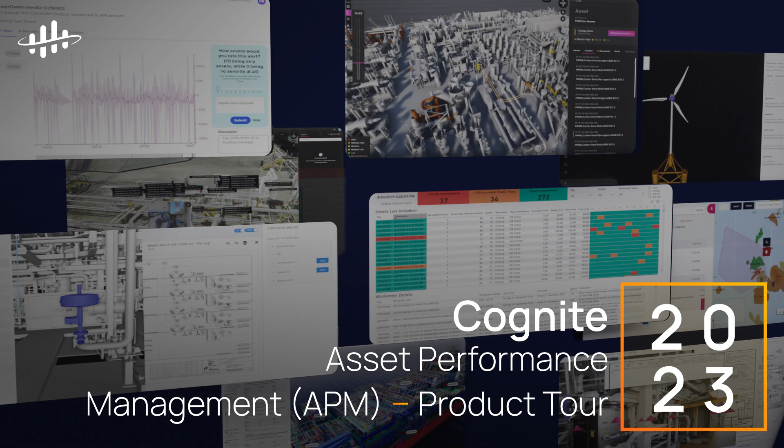matters. Today, we will cover about an hour of product and customer value-focused demonstrations. I also will be joined by my colleagues, Catherine Stentevold and Marius Biermann, who will be guiding you through the powerful key features and capabilities of our core product offerings that have allowed heavy asset companies to realize returns on investments of north of 400%.

I'm also excited to share that you will hear from our partner, Pinnacle Reliability, who will be sharing how they're leveraging Cognite Data Fusion to deploy and scale their reliability solutions faster and more effectively than ever before. In addition, you will learn about customer value stories from OMV and Celanese about how they're leveraging Cognite Data Fusion to conduct safer and more efficient maintenance and operations in the field.

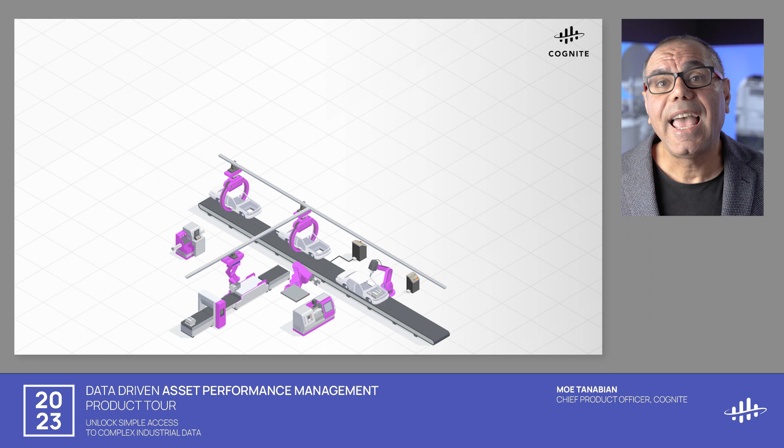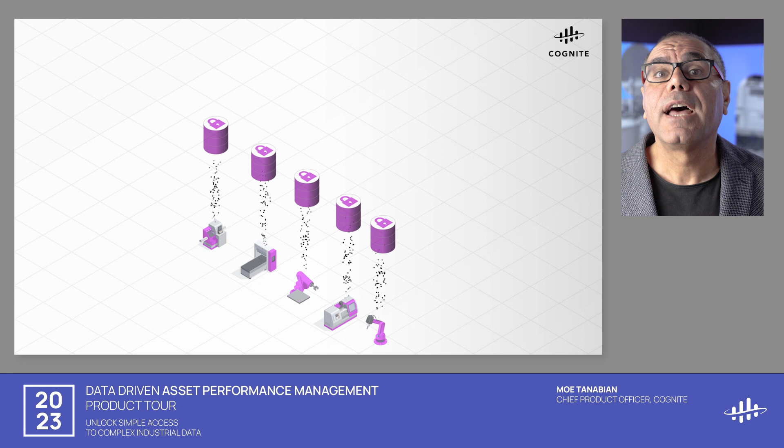APM success depends on solving these industrial data problems, and that's why Cognite's approach to APM places an open industrial digital twin at its core. And this industrial digital twin is the aggregation of all possible data types and sources, data sets, both historical and real-time, related to a given physical asset or a set of assets in a single unified location. Cognite Data Fusion enables you to bring all of your data into a single repository, automatically contextualizing it, and rapidly building use cases to improve the performance of your heavy assets.

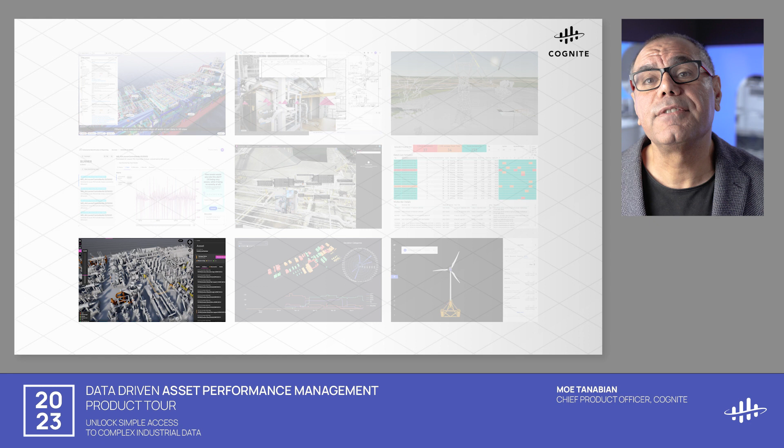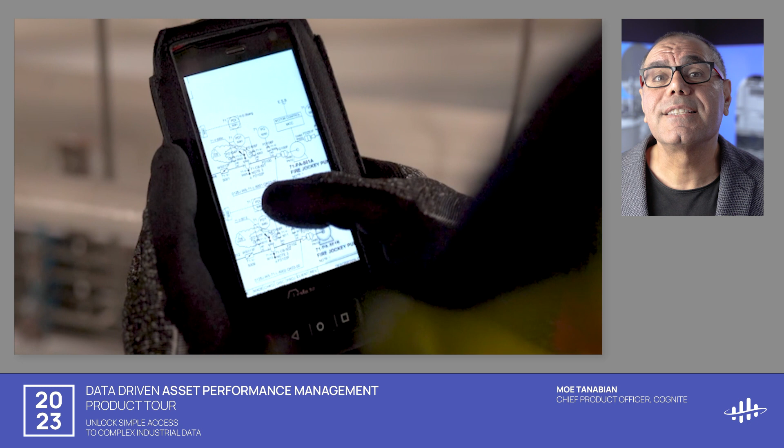Cognite Data Fusion also enables and has enabled some of the world's most innovative and most valuable companies to build, operationalize, and scale hundreds of different data-driven solutions, including those critical to APM. Moreover, Cognite Data Fusion is open, it's interoperable, and it's extensible to seamlessly integrate with your existing portfolio of APM tools, which is quite important. And it also provides your trusted partners with a scalable foundation for solution delivery without vendor lock-ins.

Now, Marius Biermann joins me to guide us through how Cognite Data Fusion can help your organization realize and scale your APM objectives and aspirations, along with our ecosystem of complementary apps, partners, and industry standard tooling. Take it away, Marius.

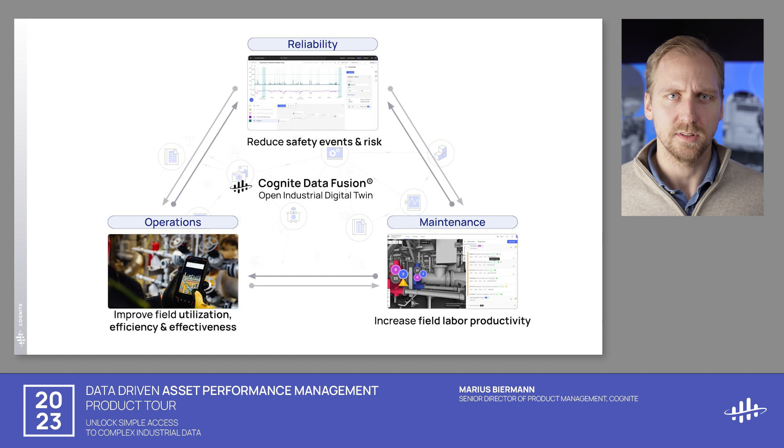Realizing ROI from our asset performance management investments starts with solving the industrial data problem. I'm going to show you how Cognite Data Fusion unifies reliability, maintenance, and operations data to create an open industrial digital twin, or a common industrial data foundation. This digital twin provides a single, trusted data foundation for operations and analytics across assets and facilities. It ensures industry experts spend seconds and not hours to find and understand the data they need.

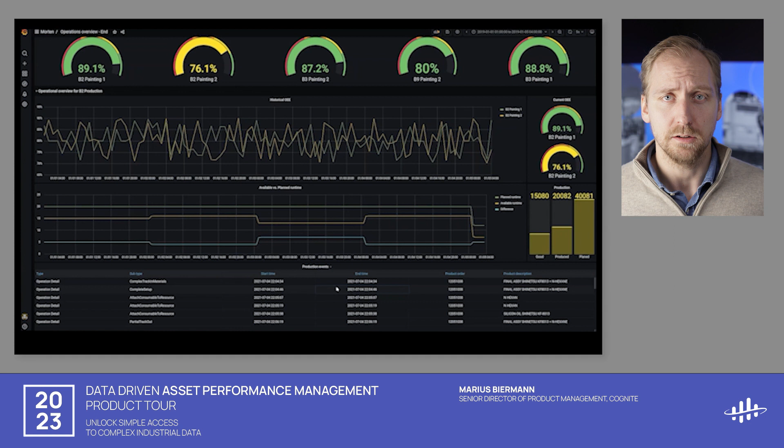Digital twins provide a means to codify domain expertise, continuously enrich your industrial data foundation, and leverage new technologies for better data capture and safer operations. And an open, extensible digital twin allows your organization to work with preferred industry standard tooling and visualization software along with trusted partners. The first critical component of a successful asset performance management strategy is to improve asset reliability and health monitoring. Providing your organization and expert equipment providers with data-driven insights about what should be done to ensure predictive, cost-efficient, and safe operations.

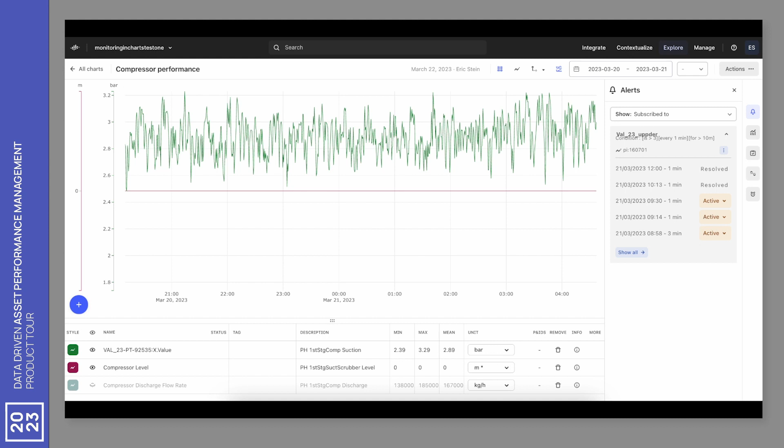Equipment monitoring rules, alerts, and dashboards provide the means by which asset-heavy organizations can optimize asset reliability. With Cognite Data Fusion, it's easy to host, configure, and manage equipment monitoring models and jobs. Subject matter experts can create threshold monitoring jobs to monitor trends on their own, no coding required.

By making data monitoring and proven visualization solutions more accessible, industrial organizations may support their shift from reactive and corrective maintenance to preventative condition-based maintenance. A major step in ensuring data-driven uptime and asset longevity.

When it comes to scalability of equipment monitoring across our fleet of equipment and assets, we must have the means to account for the messiness of real-world industrial data. Equipment comes from different manufacturers with a variety of failure modes, performance curves, failure mechanisms, which must be represented digitally to establish trust and quality in any data-driven solution.

Cognite Data Fusion makes it simple to build, populate, and contextualize data across source systems into one or more domain data models. These data models are optimized to be reused across hundreds of solution data models of various sizes and can be tailored to match your industrial reality. Choose from industry standards such as ISO or CFIHOS, or import and define a custom model to fit your organization's equipment monitoring needs and expectations.

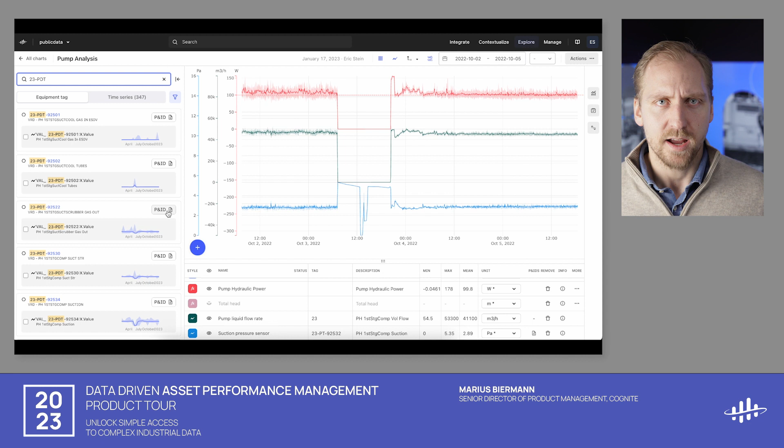The ability to perform effective, timely root cause analysis is a crucial aspect of mitigating risk and setting preventative actions. This is only possible if the necessary data is easily available. With a siloed data foundation, subject matter experts will need to go into 3 separate source systems to find asset information, time series data, and documents.

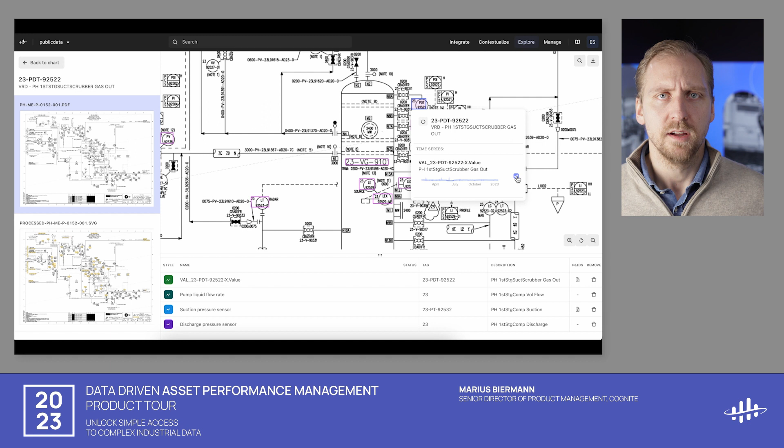With Cognite Data Fusion serving as the industrial data layer, subject matter experts have simple access to complex industrial data. Anyone in your organization can seamlessly work with data from across IT, OT, and engineering systems to gain an accurate and comprehensive view of the industrial reality. This includes equipment information, time series data, interactive engineering diagrams, 3D models, point clouds, and much more.

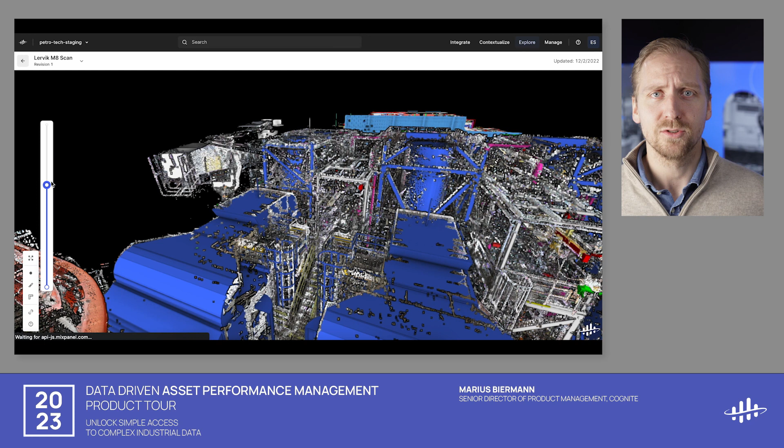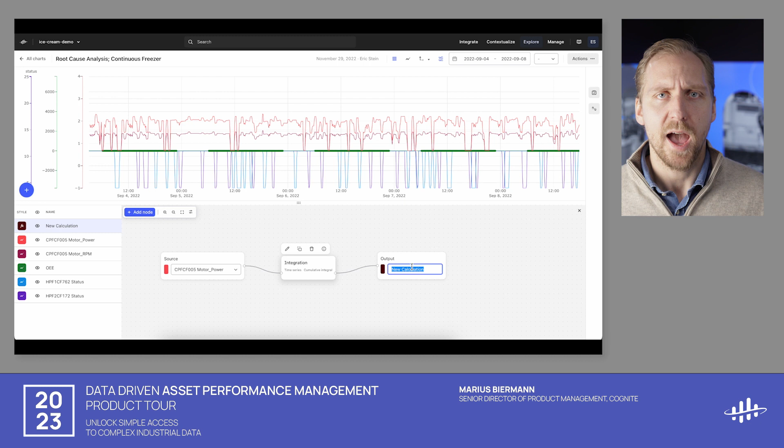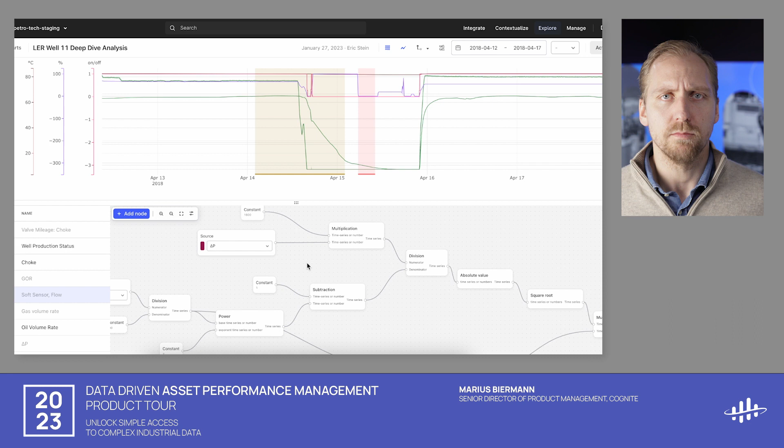Using this contextual understanding, subject matter experts can troubleshoot and resolve issues in a fraction of the time. Some of our customers have been able to reduce the time to identify root causes by over 50%. Cognite Data Fusion no-code interfaces and analytics tools allow subject matter experts to work hands-on with industrial data. Overlay event and time series data to see the effects of maintenance events or unplanned downtime. Build simple or robust calculations to create new, more valuable insights, critical for safe and reliable operations.

We are proud to welcome our partner, Pinnacle Reliability, who are sharing a deep dive and demonstration about their reliability offering and how they are combining reliability expertise with the power of liberated contextualized data and Cognite Data Fusion. Hi, I'm Lewis Makin, and I'm a partner here at Pinnacle, and I'm excited to share with you how we make data-driven reliability a reality.

In the world of reliability and maintenance, we're constantly challenged with maximizing our uptime, reducing our downtime, and doing it in the most cost-effective way. Unfortunately, there are many challenges to doing that today. If we look across the 3 areas that we see the most challenges with our customers, we break it down into 3 themes. The first theme is focused on work processes. Today we see that many are very disconnected between fixed equipment and non-fixed, which basically means that our managers spend significant time prioritizing decisions and lack clear visibility into which actions are most impactful.

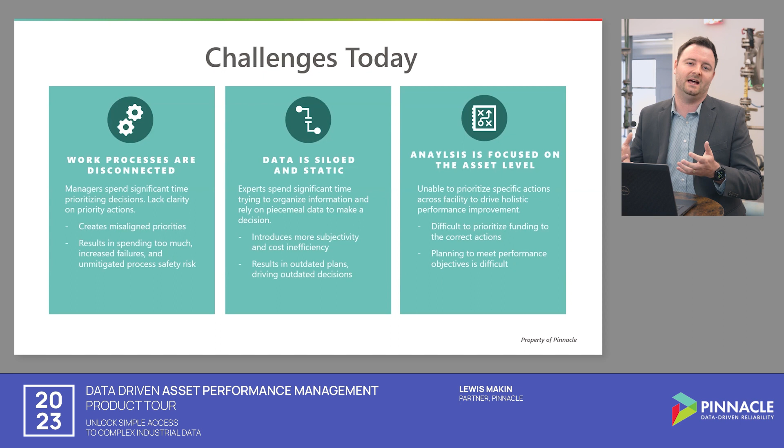The second piece that we see is data is siloed and static. There's a significant amount of time spent by our experts today just combing through data instead of using that time analyzing the right decisions. And finally, a lot of the analysis that we do today is focused on the asset level, the pump, the fixed equipment. Where we see improvement is actually focusing on the system level and bringing data to that to make a better aggregated decision more holistically.

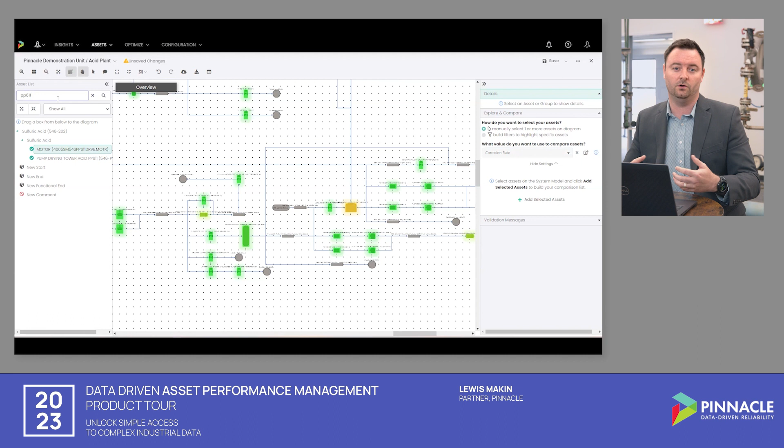The next thing we're able to do is actually search for and look at specific pieces of equipment. So I'm going to jump here to a pump that I've pre-selected. And then we're actually on corrosion rate right now, but let's jump to maybe the SHE risk here. And you can see that that color adjusts, right?

One of the interesting things here, if I click on this pump, as I already have selected, we've already contextualized all of the SAP records from this pump and actually visualize that here on the front end of our application as well. And again, because CDF is acting as this master aggregator, it's pulling in all of this data and we're now able to use that and visualize that for our end customers. And so you can see here the start date and all of the associated metadata that we can customize for customers to see and basically tailor their experience.

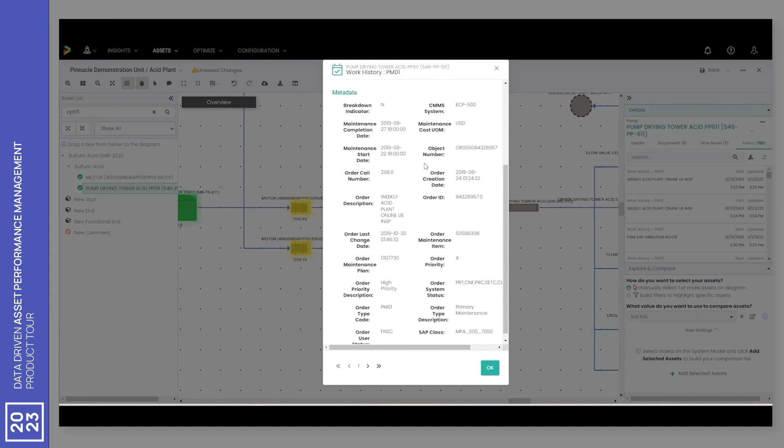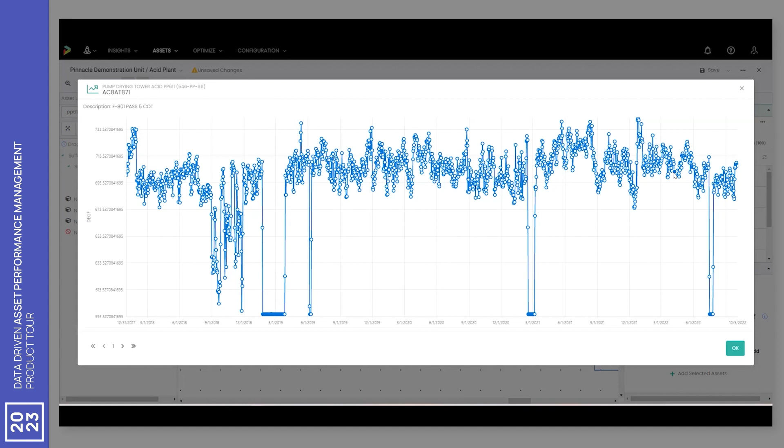The other interesting thing that we can do is we can pull all of the different time series data associated with this asset. So here you can see the different temperature readings on this pump, maybe a couple different sensors on the bearings. And again, we can see all of that time series data real time as it's ingested through CDF.

The next aspect that we've contextualized is all of our documentation. For this example, we put together a quick P&ID, but very easily as a user, I can jump in and understand where this pump is in relation to other pieces of equipment. And the other thing that you're seeing here is one of our deliverables, which we call our circuitized P&IDs, which is breaking out all of the different piping components into their different corrosion loops and failure loops as well. So again, enriching that experience that's provided to our customers. And then finally, any other metadata that we want to view or see that's contextualized to that piece of equipment, we can do so very easily and very quickly.

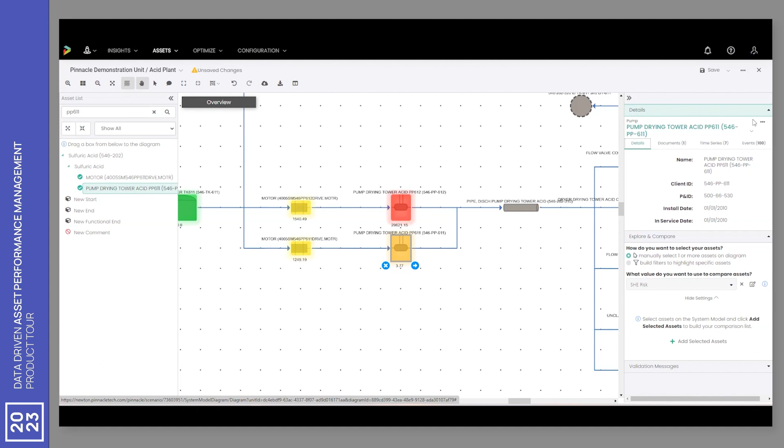Now, looking at information is great, but the real power of CDF and putting that on with Newton is we're now able to drive future and more predictive analytics. So let's now jump into this pump. So here I'm going to open up what we call our asset risk assessment. And the first landing screen you're going to see here is our results page.

So this is now for the specific pump. And real quick, I can look at different components of that pump. I can look at my bearings, I can look at the seal, I can also look at the impeller. I can look at any different type of failure mode or component that I want and look and model that.

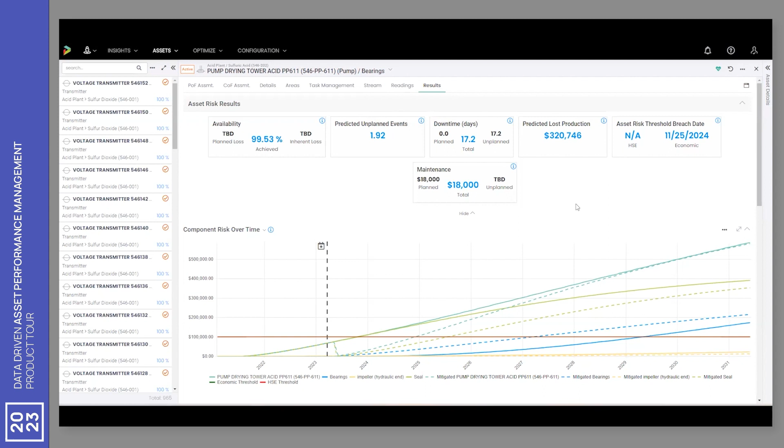One of the interesting things that we're able to do here is essentially look at all of the component risk over time and all of the different components and their impact of failure on that specific pump. And so you can see here as we kind of scroll down on this table, we're pulling in all of the percentage and the predicted unplanned events associated to each component.

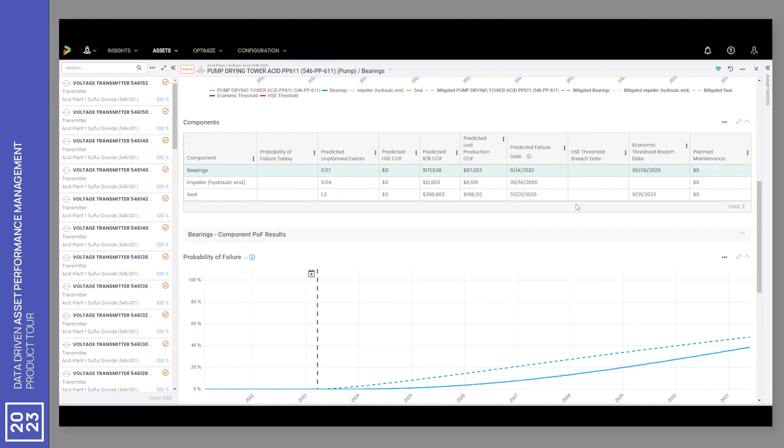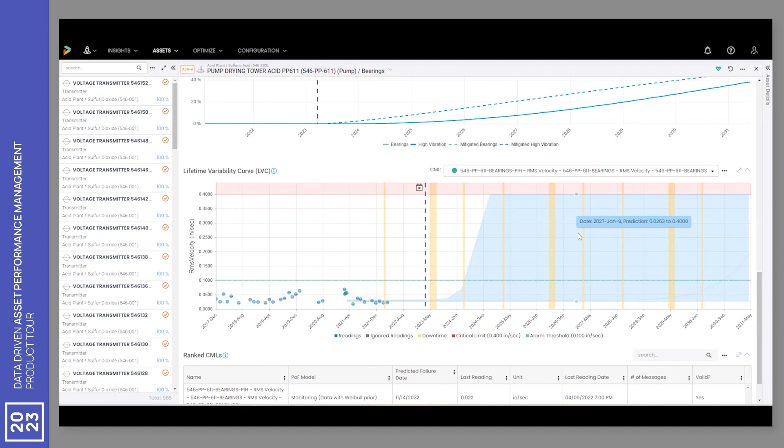And what's really neat about this is each component can then be modeled down to the specific data that's actually driving that failure mode. And so on this component, which we're looking at the bearings, you can see here what we've got, which we call the lifetime variability curve, or LVC. The LVC is a predictive model that we're essentially ingesting the RMS velocity readings, again, from CDF, real-time, live data, and our model is taking that, it's calculating an algorithm, and it's basically projecting in the future a probability of failure for this specific component.

This is very similar to the way that we track hurricanes here in the US, where if they're out in the Atlantic, we have a little bit of data, and there's a very broad range that we can potentially fail. As we collect more and more data, that cone of uncertainty, that blue shaded area, is going to refine over time. Why is this important?

Because just like the availability projections that we did on the overall unit, we can also start to outline all of our downtimes. And so this is really, really powerful for your turnaround managers, for your integrated event managers, to really understand, okay, if I need to go and fix this piece of equipment, or I need to do preventative maintenance, today, using real data, live data, what is the potential that this asset is going to fail? And we're tracking that and updating that real time using this approach.

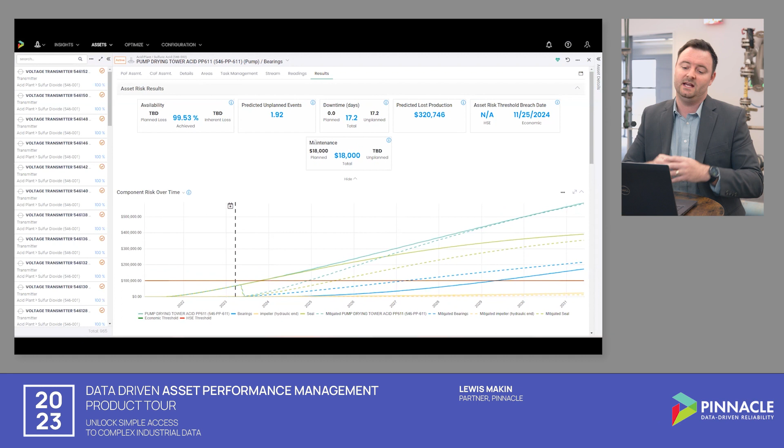So this is just one example where we're leveraging the LVC. We turn that LVC into a probability of failure curve for that component, and then obviously bring all of those components together to then project out all of the different components and risk over time. What this enables us to do is now this pump, in essence, has a prediction of failure at a certain point of time and a probability associated to that.

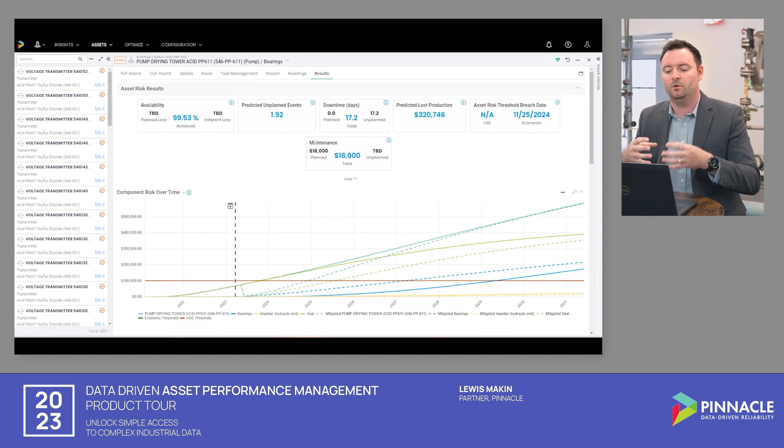We then roll that up back into the system model, and then because we've connected the pump to the pipe to the drum and all these different equipment, we're now able to look across the entire system and then start prioritizing things back to this overall dashboard, which I showed to you guys at the start. So again, just wanted to showcase just a quick product that we've developed on top of CDF and the enrichment that that's provided. And we think this is very powerful for the end customer.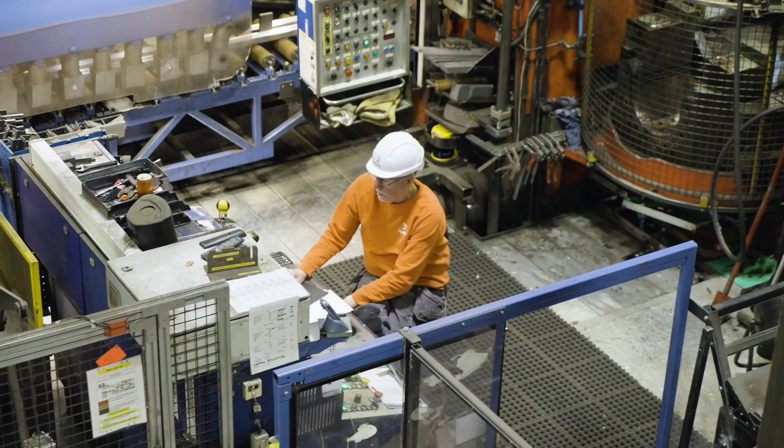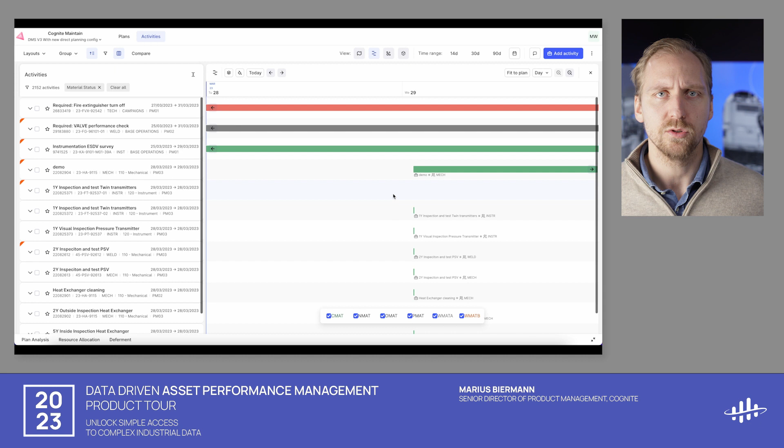Cognite Data Fusion makes it possible for industrial organizations to share previously siloed information and improve backlog prioritization, work preparation, and activity sequencing. To ensure plant stability and maintenance process optimization, we offer a dedicated, complementary solution that is fully integrated with our industrial DataOps platform, Cognite Maintain. Cognite Maintain is an AI-enhanced planning application that helps asset operators optimize efficiency and reduce waste by enabling efficient scoping, planning, and execution of maintenance work.

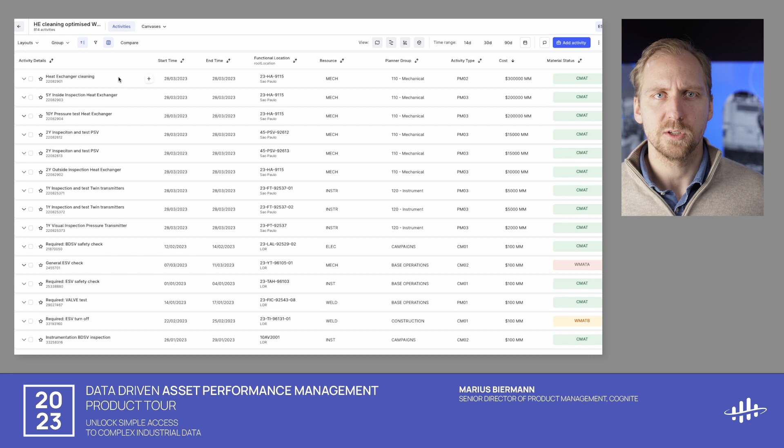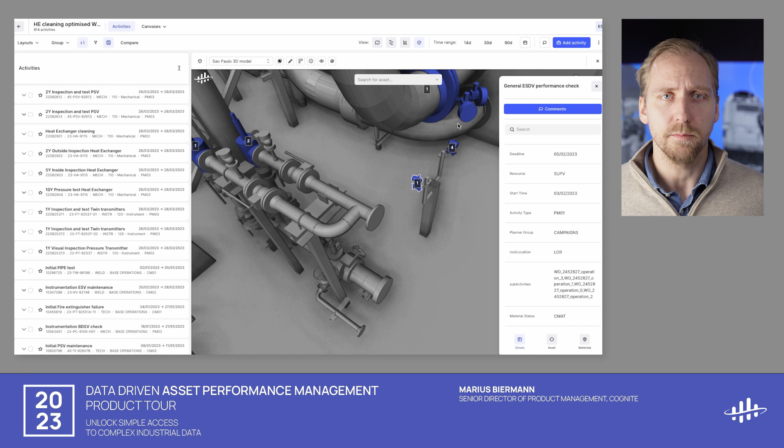Let's delve into some of the concrete offerings within this industry application. Cognite Maintain leverages the fully contextualized data in Cognite Data Fusion that has been liberated from their siloed source systems. This makes it possible to display a list of work orders prioritized by, among others, risk factors, and maps them to an intuitive 3D asset model for an optimal real-world frame of reference. This planning optimization workflow is supported by AI-driven suggestions to ensure the best possible maintenance outcome. Cross-functional alignment is made simple thanks to a built-in overview that identifies resource constraints and dependencies.

Cognite Maintain also allows planners to define the best possible sequence of work based on key criteria such as process links, proximity, simultaneous operation parameters, material status, and more. By bundling maintenance activities, planners can easily assess resource needs and receive assistance to identify clashes and opportunities for optimization in the existing maintenance schedule.

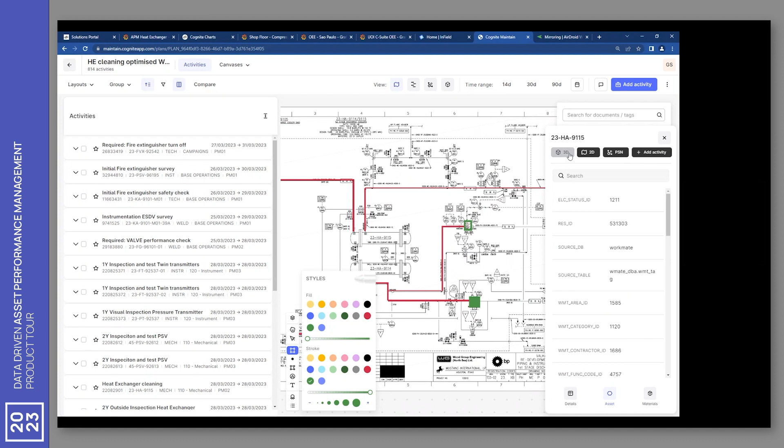As maintenance planners conduct more effective backlog prioritization, work preparation, sequencing, and bundling of work orders, the maintenance team can work in sync with other departments to help lower execution costs and ultimately increase production efficiency. Cognite Maintain places a powerful and fully contextualized digital twin in the hands of your maintenance experts to save valuable time during the planning process.

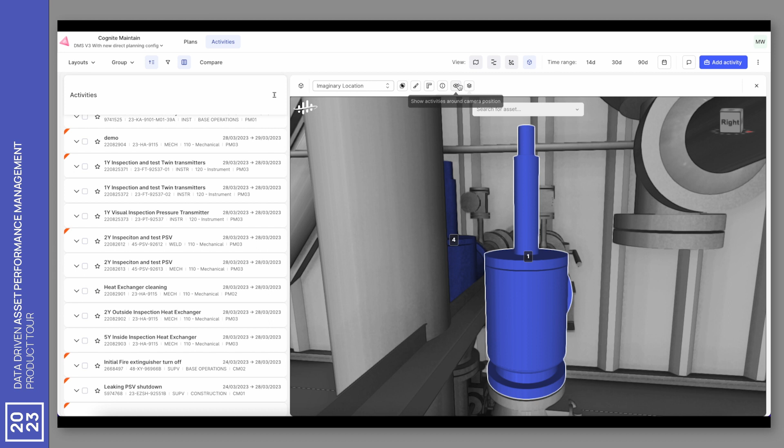Planners can plan corrective work in context thanks to access to all relevant data in a user-friendly interface. Leverage visual data resources while planning and preparing for maintenance activities by seamlessly transitioning between 3D models, interactive 2D P&IDs, and documents, and even photogrammetry renderings of the as-is asset to gain an accurate understanding of the industrial reality.

Experts can perform isolation planning and line walks in a collaborative digital workspace, as well as visualize and annotate engineering diagrams from numerous sources for improved work order quality. Before I hand it over to Cathrine Stenstadvold to discuss the operations domain, we are proud to introduce OMV, who will be sharing how they have realized value by optimizing the way they do maintenance and integrity to ensure the most accurate and up-to-date information is only a click away.

In the use case for planning, inspections, and maintenance, we've seen a 50% reduction in the planning time. Cognite Data Fusion was also responsible for a 6% deferment savings on production. OMV is an integrated oil and gas company, an energy company with a transition into new energies. I look after the maintenance and integrity side of the business, where we're trying to optimize the way we do our maintenance, the way we do integrity, trying to get the most accurate, up-to-date information and being able to find the data. Having data one click away has always been our objective.

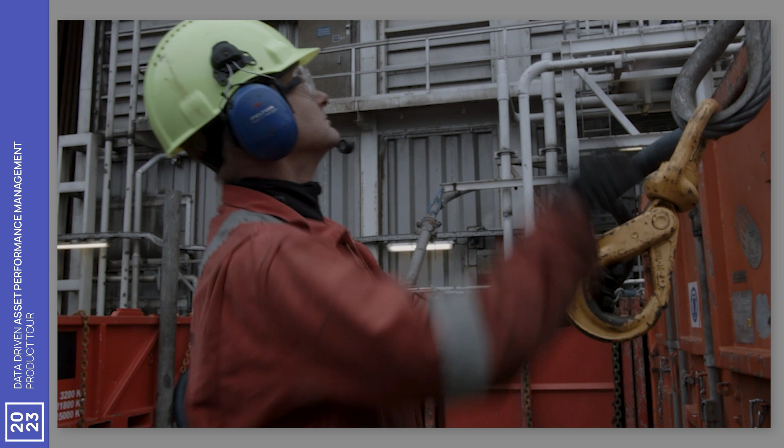And I think using Cognite Data Fusion, it enabled having all the up-to-date relevant documents, P&IDs, isometric drawings, standards in one place where we knew they were the accurate ones. Then we can fuse all of this together and get them a really good understanding of how all of these work orders affect their production and how they can plan these work orders in the optimal way so that they can minimize the deferments in production.

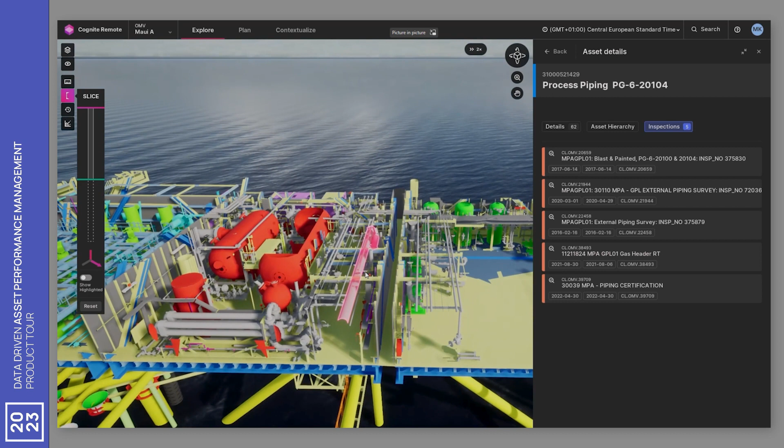On an offshore platform with multiple layers, sometimes you cannot know exactly where a piece of pipe goes from one layer to the next. Being able to go onto a platform, fly through the 3D model, go to the location they want, click on the vessel or the piece of equipment and have access to all the data they need from all the relevant systems. It enables the business value for our integrated activity planning, where we try to optimize end-to-end from the well site to the export point, the whole production system. It goes into making sure that we've got a safe and reliable plant and also trying to reduce deferments for production.

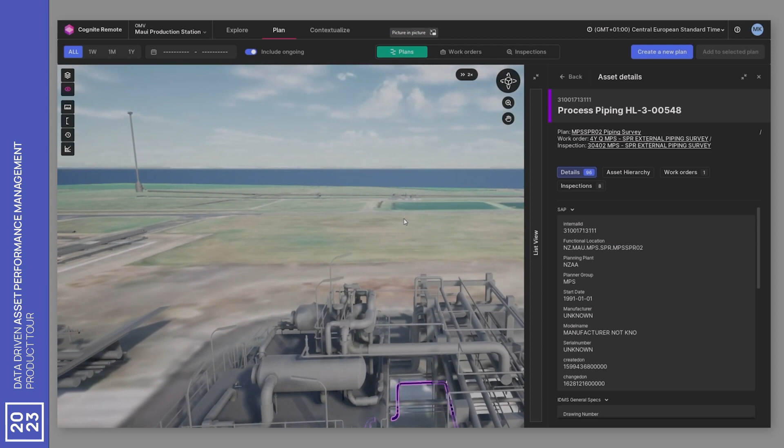The roots of OMV are with oil and gas. Nevertheless, all that we have built together in the collaboration with Cognite is not tied to oil and gas. We are on the move towards green energy through different energy sources like geothermal, but also projects like carbon capture and storage. And all that we have developed with Cognite, we are able to utilize for that technology and for that alternative production of energy as well. As we add more and more sensors and real-life data into Cognite Data Fusion, we also see the scalability of how Cognite can be used in other countries, other assets, other facilities, to make sure that we can maximize the value of a single tool.

Thank you, OMV. Now I'll hand it over to Cathrine Stenstadvold to talk more about the operations domain. Hello, my name is Cathrine Stenstadvold, and I'm the senior director of product management of our application portfolio. Thank you very much to OMV for sharing their inspiring accomplishments within maintenance and integrity.

So we've now come to the third and final step along the industrial improvement process, to ensure efficient production and execution within safe operational parameters. Cognite Data Fusion allows asset-heavy organizations to support field executions across operations, maintenance, and integrity, as well as capturing relevant data from the field to improve your overall asset performance and availability.

During our latest webinar with Forrester, presenting a deep dive into the total economic impact of Cognite Data Fusion, Paul Miller, the Vice President and Principal Analyst at Forrester, discussed the trend of balancing the automation triangle. Paul highlighted the importance of finding the right balance between investments in hardware automation, things like robots and drones, software automation, like AI and machine learning, and the skills of your human workforce. It's not about replacing all people with robots. Rather, it's about finding the appropriate balance to draw upon the unique capabilities that each brings to the conversation.

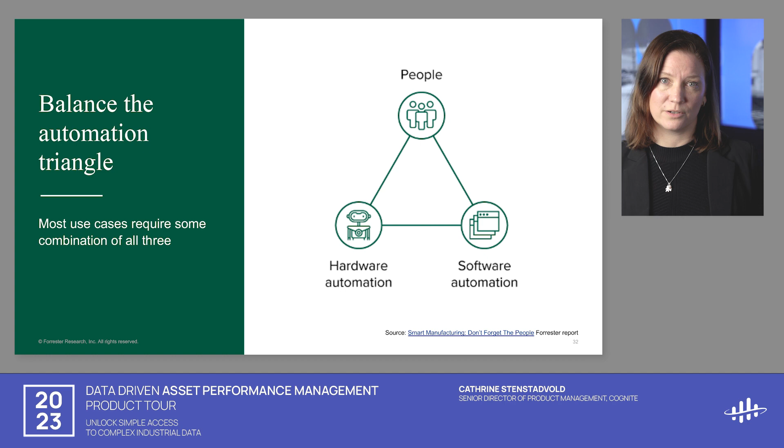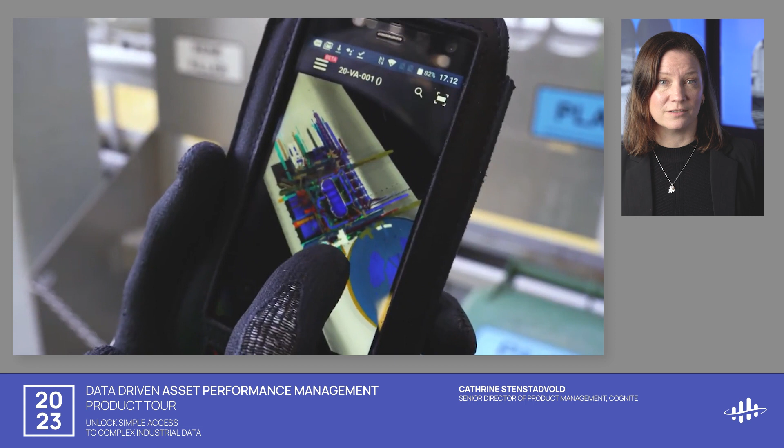Cognite InField equips your field workers for digital transformation. This Red Dot design awarded application is tailor-made for your field workers to utilize, whether they are in front of a desktop computer in the office or on their mobile phones and tablets while walking on the shop floor.

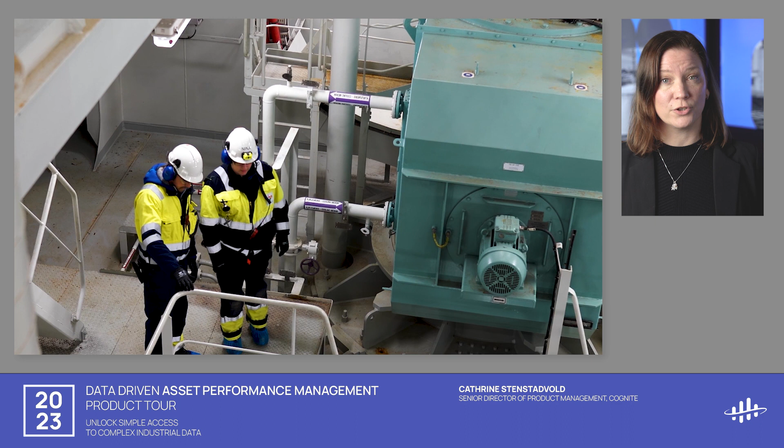Remember the work order your maintenance planner scheduled via Cognite Maintain? With a click of a button, it becomes a checklist, typically a to-do list, that is readily available to field personnel for execution during their next round.

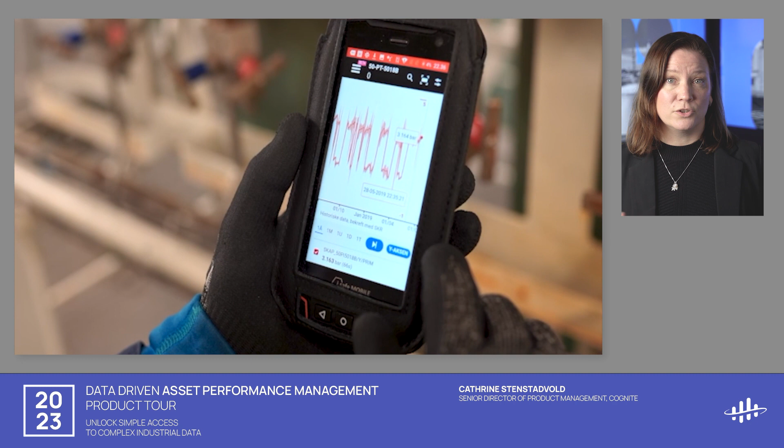Once the frontline workers are in the field, performing these specific tasks and checklists, complex industrial data from across systems is readily available. This data can be things like process data, documents, drawings, images, and of course 3D diagrams are safely controlled of the latest and most up-to-date information.

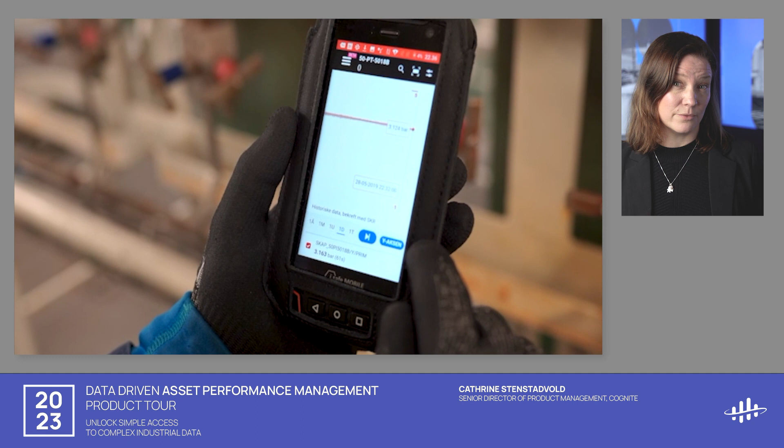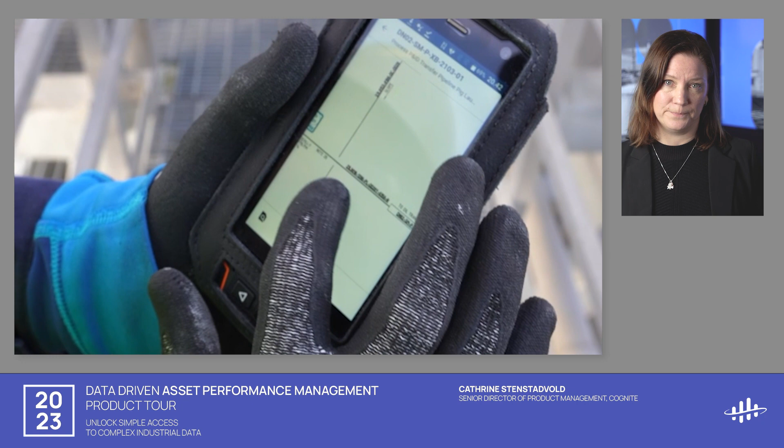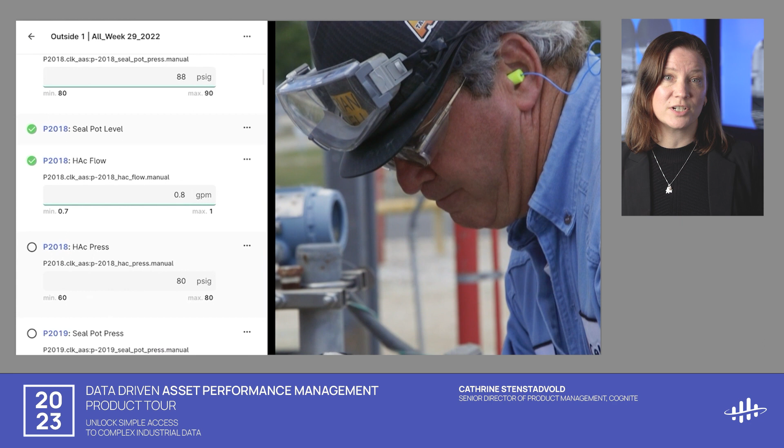Tags in the field can be scanned to easily read the live sensor data to ensure equipment is safe to work on. And of course, all of the isolation plans and step-by-step maintenance instructions are just a few taps away. With Cognite InField's smart reporting capabilities, all the feedback and status updates are captured and contextualized instantly so your teams can consistently improve your maintenance and integrity strategy.

Moving from maintenance, let's take a look at the operator rounds. There is a tremendous potential for value creation by digitalizing operator rounds, which traditionally rely on mountains of paper, spreadsheets, and complicated processes. Cognite InField allows for the digital creation, scheduling, and assignment of operator rounds. Routine rounds can be saved as templates and then automatically scheduled or assigned to specific users or disciplines as required.

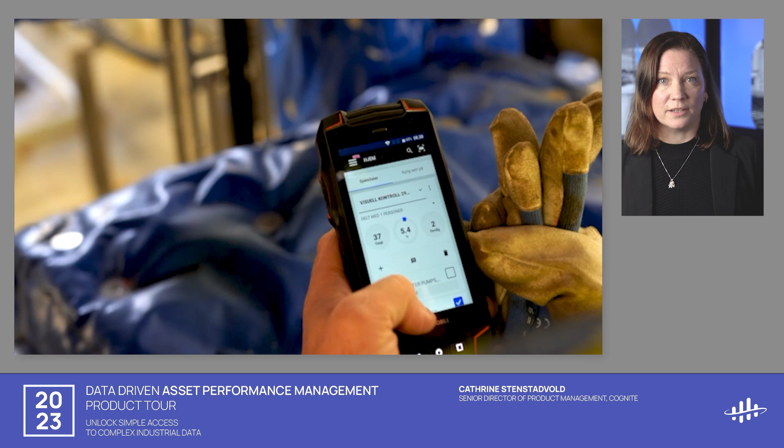Ensuring routine rounds are transformed from a paper-based manual process to one that is digital, simple, and scalable. Execution and reporting are built into the application, and all relevant data is readily available at the operator's fingertips in a user interface that is tailor-made for use in rugged industrial field scenarios, of course, while wearing safety gear.

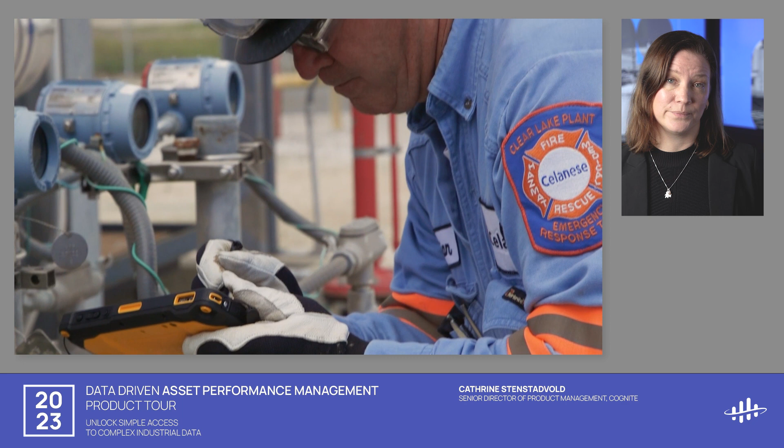Like all solutions in Cognite's ecosystem, Cognite InField is built on top of the same industrial data foundation. This ensures that the digital twin is continuously enriched and new data is contextualized as the operators take instrument readings, snap photographs of the equipment, and submit comments during routine rounds. This will provide operational insights for the broader organization to make better decisions and to bring the office and the field closer together.

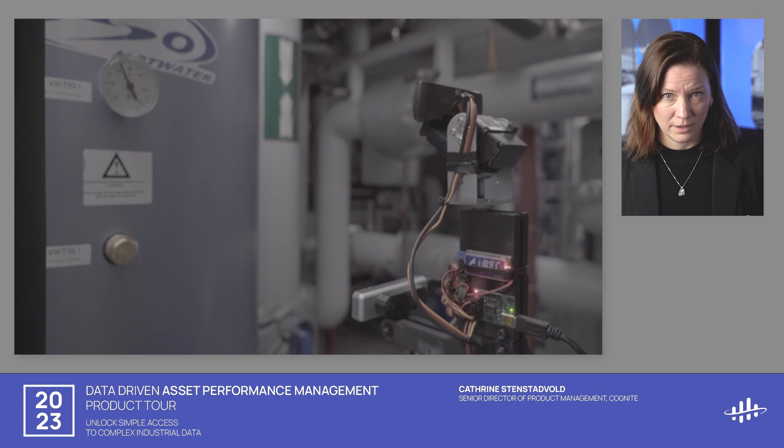We do, though, believe the future of industrial operations is safer and more efficient. Automated operator rounds performed by robots, drones, and other new technologies will play a crucial role, both to free up valuable time of subject matter experts from performing simple routine tasks and to reduce the time they spend in dangerous areas. More frequent and richer data capture also becomes possible. Again, it's about striking the appropriate balance between hardware automation, software automation, and of course, human expertise.

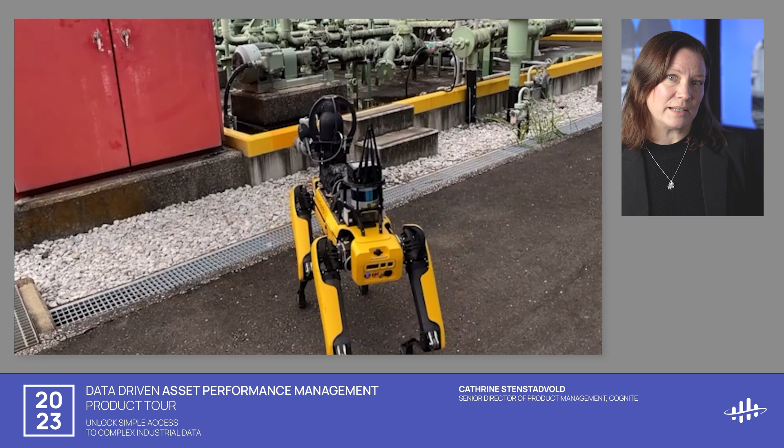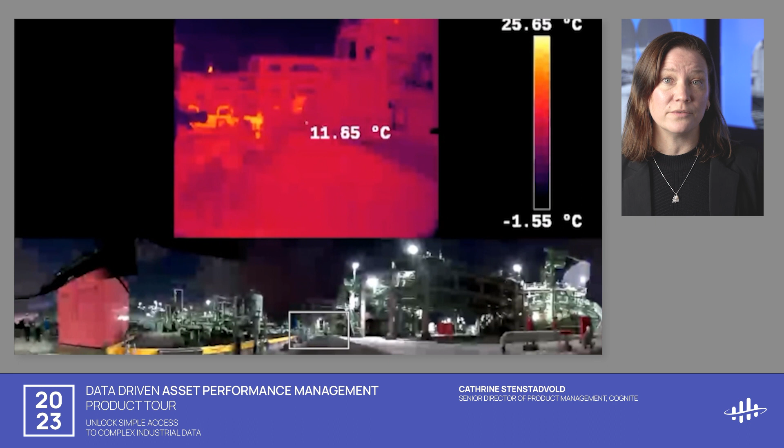We have built a dedicated application to help asset-heavy organizations get value out of your robot deployments, Cognite InRobot. You can configure and deploy your robots, execute robotics missions, and remotely take control at any point in time. Performing daily visual operator rounds with available data through a simple UI for on-site and remote process operators. Facilitate robot-assisted observations in the field under teleoperation of the robot, particularly in situations that previously required your people to enter dangerous and hazardous environments.

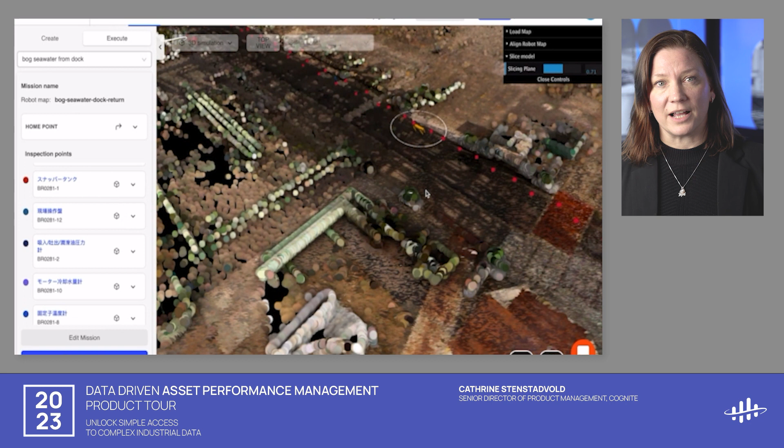You can also set up condition monitoring based on extracted values from dials, digital and level gauges, and of course also thermal cameras. Your digital twin is continuously updated with this data and is made readily available and accessible to all who need it.

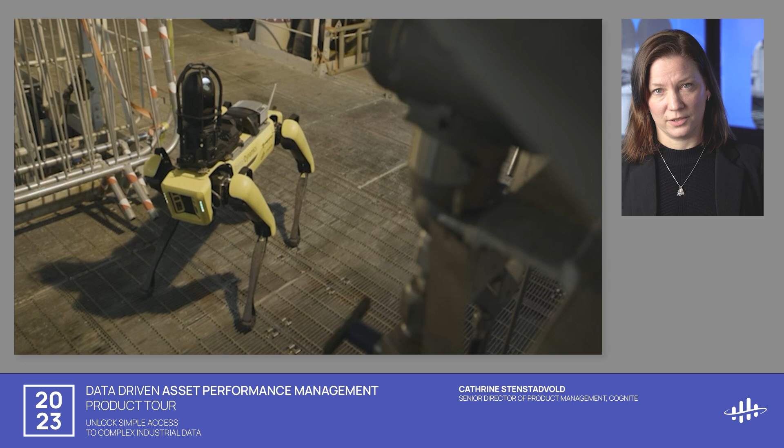Regardless of whether you are just starting to include robotics and autonomous workflows in your operations, or if you're reaching a higher level of maturity with proven success cases, Cognite Data Fusion ensures you have invested in an appropriate, open and scalable industrial data foundation. With Cognite Data Fusion, robots become a valuable resource for continuous data enrichment and improvements, rather than physical walking data silos.

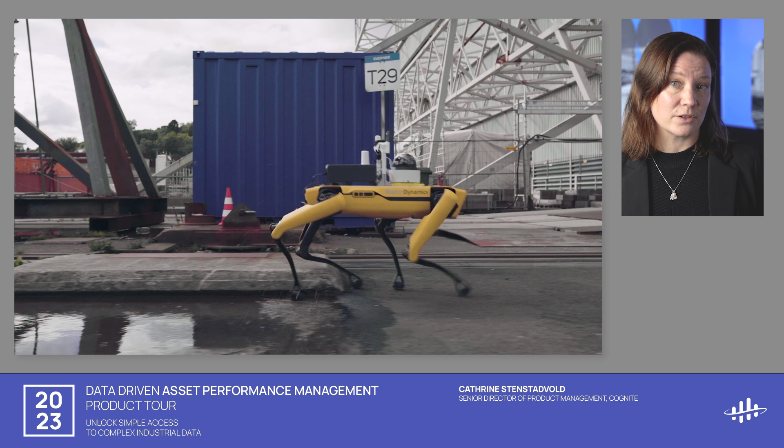Moving from the robotics theme, we are now proud to take you to the folks at Celanese, who will be sharing how they are empowering their people to be excellent at making data-driven decisions to become a digitalization leader in the manufacturing industry.

Finding data now is very difficult. You either have to know who has it or exactly where to go get it. So on a day-to-day basis, I use Pi, Bentley, Visio, Word, data historian, Excel, manual entries on paper.

Get documentation from ProjectWise, get different sets of documentation from our paper files, different sets of documentation from LAN drives. They have to go into 1,000,001 systems. Oftentimes, it takes more time to actually pull all of the data together from the different sources than it does to analyze them to understand what's going on.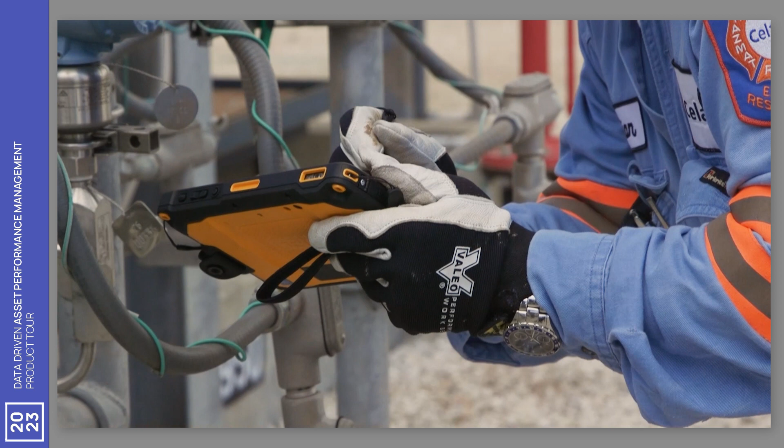Celanese is on a digital transformation journey. Our digital strategy will enable us to be consistent, reliable, and predictable with reduced costs and optimized manufacturing operations. But the key to our success is not in one application. It is in each and every one of our people.

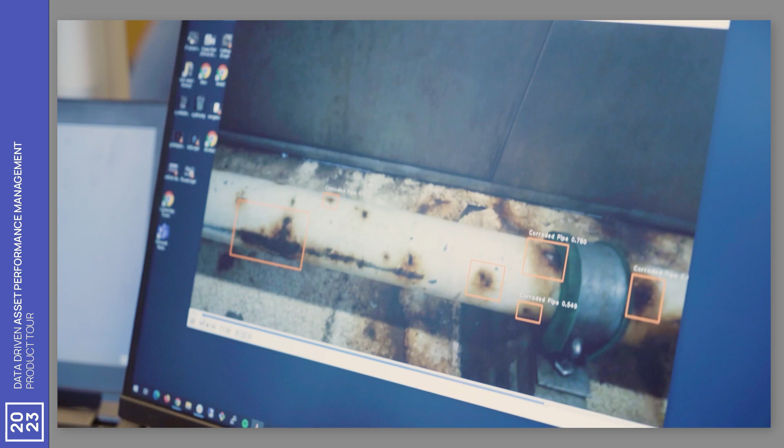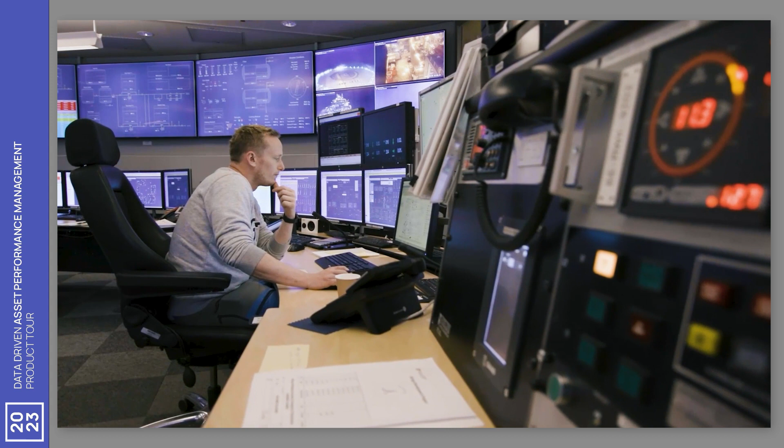A successful transformation doesn't just mean a positive financial impact. We're on a mission to transform our people by giving them new tools to do even better work more easily with the power of data, analytics, and artificial intelligence. Digital transformation isn't a one-time event. It's about putting data into the hands of every one of our experts. The most valuable asset Celanese has is our people. Digitalization gives us the opportunity to transform the work our people do.

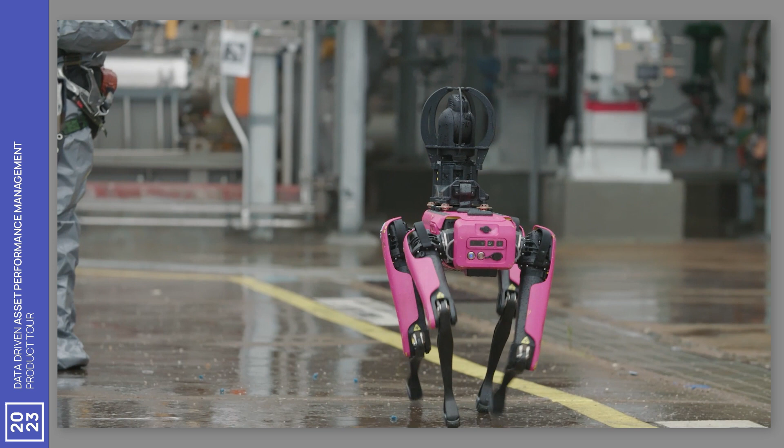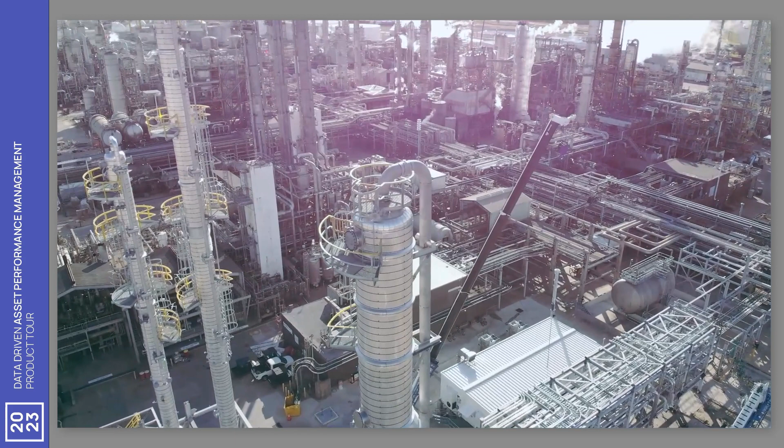From the beginning, Celanese knew that a successful digital transformation requires the ability to move with speed and innovate at scale while keeping their employees at the center of the experience. We're working with Celanese to achieve their plant of the future. Cognite Data Fusion provides the foundation needed to build tailored solutions that increase operational efficiency, accelerate research and innovation, and

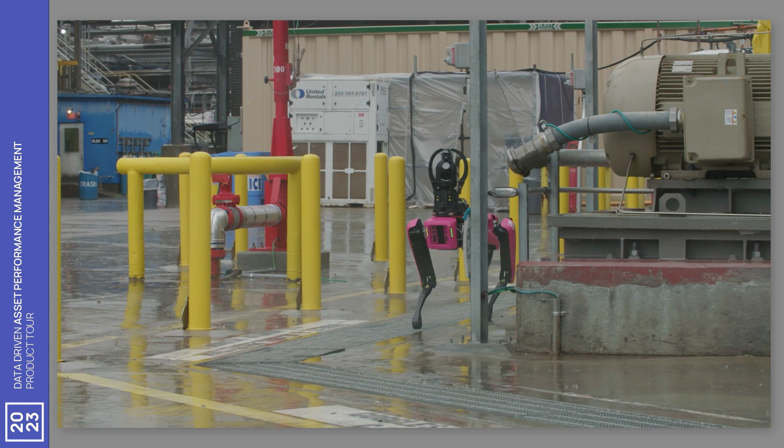deliver new services. We're working to put the power of digital innovation into the hands of all Celanese experts, providing digital tools that help keep employees physically and emotionally engaged wherever they are working. Now with the data availability all in one location at everyone's fingertips, we are allowed to spend more time actually creating solutions for problems instead of trying to figure out what the problem is. I can click once and I can see all of the data versus having to go to multiple places. It just gives me time back.

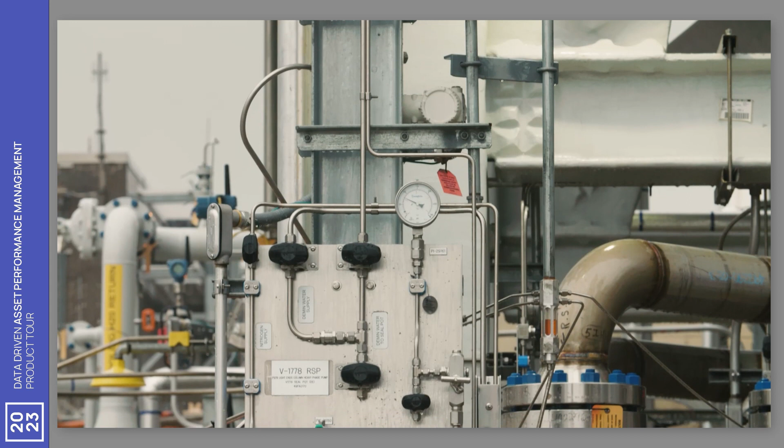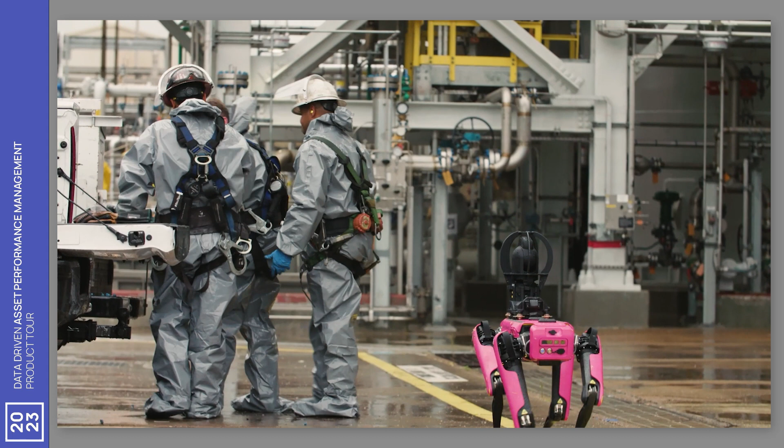Having a robot dog to go read a gauge every couple of hours makes a whole lot more sense than me having one of my process experts go and do it. So now the process expert can be doing something that's really much more value added to the team. So one of the really exciting things that we've been working on right now is an application allowing us to digitize those operator rounds that we take and get that data real time.

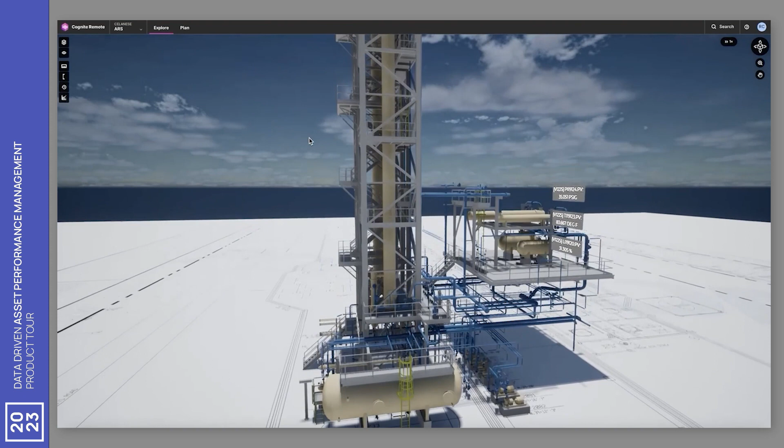The piece of equipment that it's tied to, we can click on in the 3D model and we can see all of the work notifications that are associated with it. I can open a piece of equipment, I can search it, and I can look at all the functional locations, P&ID numbers. I can just hold down control, click all the pieces of equipment that I'm interested in, and have all that data at my fingertips.

But the real value to me is the time that we're going to give engineers back to really have them lean into data and expand their knowledge and the capabilities, not just of themselves, but of the plant as well. Analyzing data is fun. It's a big part of why I wanted to be an engineer, and using this software allows me to do more of that.

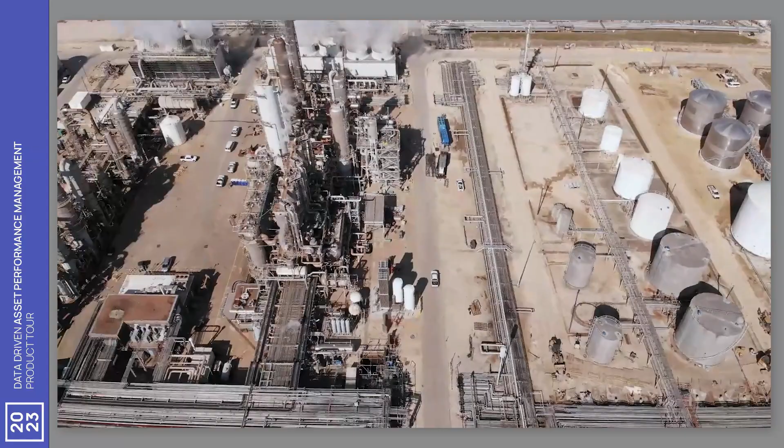Celanese is paving the way to a more digital business, enabling improved decision-making on the right data at the right time and in the right place, so that Celanese can improve reliability and operational excellence and continue to manufacture quality products safely.